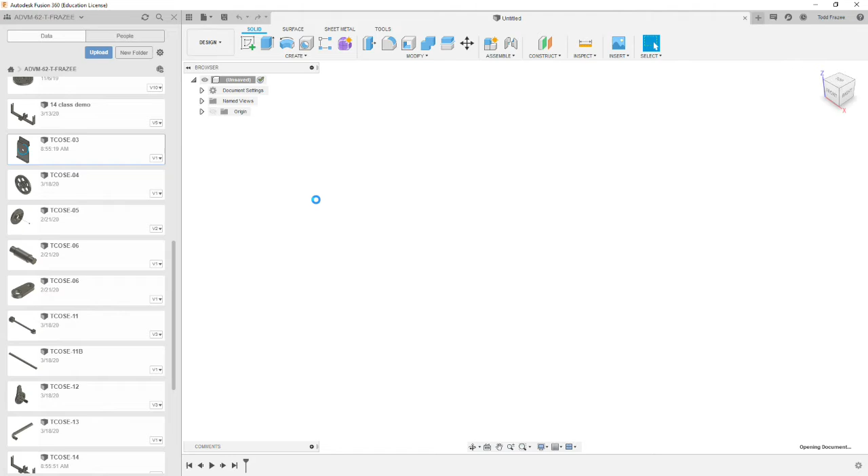And we will go through all those steps in this tutorial. So first we're going to bring up our model, you're going to open the TCOSE-03 model. I'm going to go ahead and minimize the data panel so we have plenty of space here. Okay, we've opened our file, our -3 file, and it's a sheet metal part.

So to support the manufacturing side, we have to create what's called a flat pattern. And the unfold command is only for modeling purposes. The flat pattern is a support manufacturing. So it creates an actual extra entity here on our feature tree.

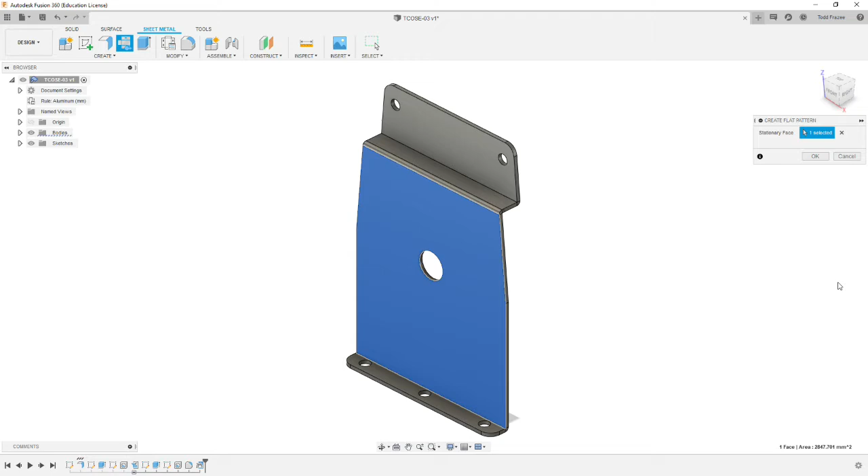You're going to go to the sheet metal, create flat pattern. You're going to pick on a neutral plane just like you did with the unfold command and select OK. And it's going to enter a mode similar to sketch mode where you can change the flat pattern itself. And what it does is it puts in the bend lines where you would actually bend the part, and those go in as these phantom lines and flattens the part.

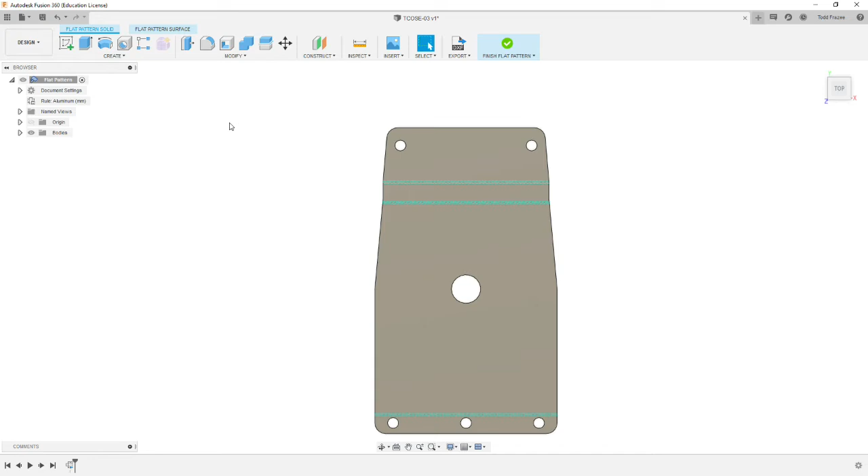We don't really have to do anything to it, so we're just going to hit finish flat pattern. And then what happens is a flat pattern feature showed up on the feature tree below document settings. If you want to go back to the flat pattern mode, you just select the box and you go back into it. So we're going to hit finish flat pattern.

And it's always a good time to save when you're switching modes. And then we're going to switch to the manufacturing workspace. We want to make sure our units are defaulting to inch in the manufacturing workspace because our equipment's running in inches. And the model, when you're in this mode, will be all in inches.

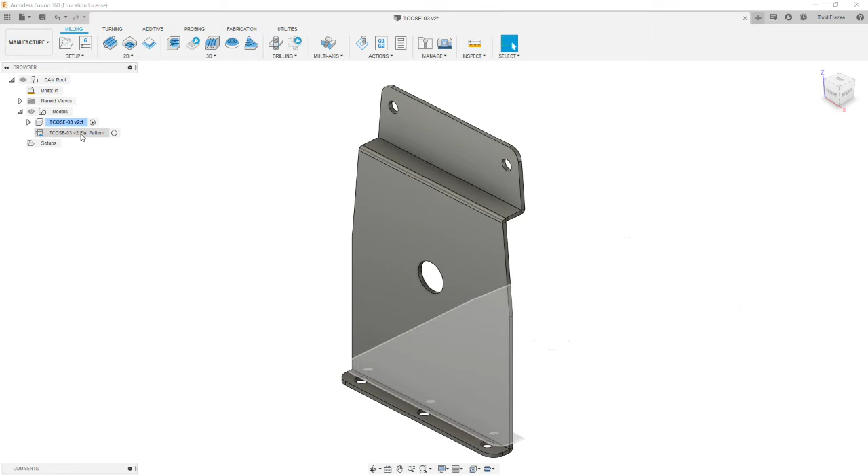Okay, so once we're in manufacturer mode, you need to expand the models tab. And embedded in it is the flat pattern. So we want to activate the flat pattern. And it shows it in a flat state. And it defaults to throwing an X, Y, Z plane like shown.

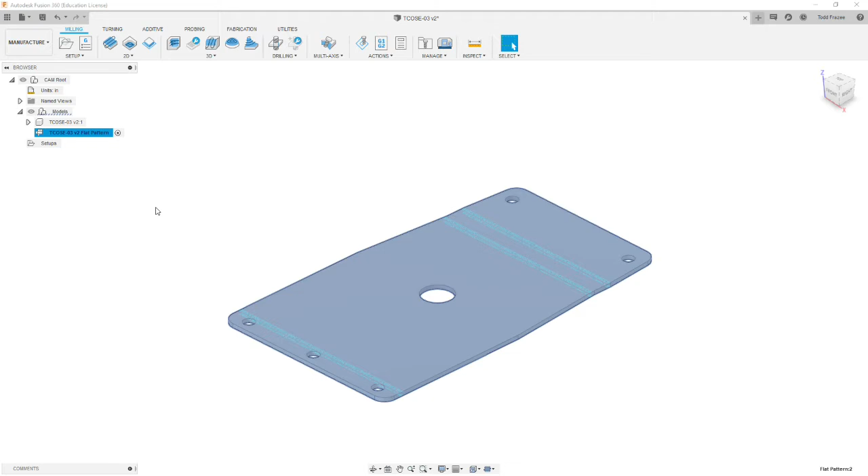And we now can start working on the toolpath. So the very first thing you do in any of the manufacturer steps, no matter what mode it is, you're going to create a setup. We're going to click on setup. And we're going to make sure we're in fabrication mode, because we're going to be using this cutting command. You're going to go to the pull down menu under setup, and we're going to create a new setup.

Now there's various parameters in here that are going to set up the stock and your origin and the naming of your program that you're actually going to run on the machine. So the tab order on this to me is not intuitive. It seems easier to me to start on the stock tab because some of the selections under setup are dependent on the stock tab.

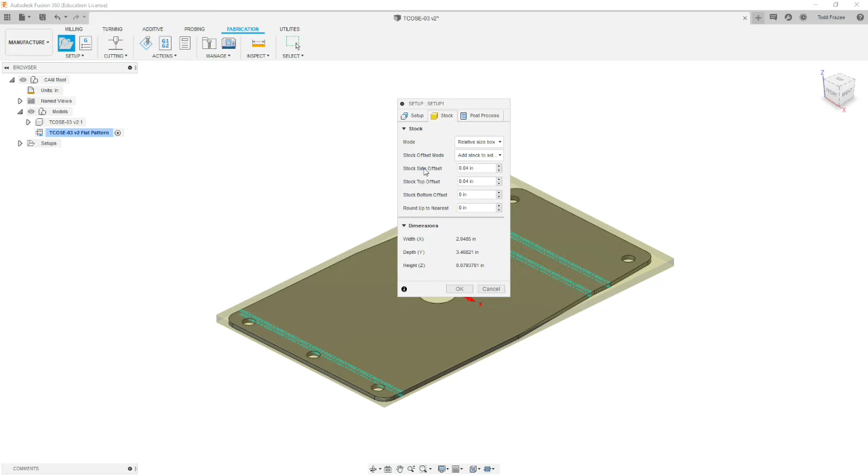So go to the stock tab first, and we're going to set the material size that we're going to start with. So we're making this part, but we're going to make it out of a larger piece of material. So assuming we're just going to cut one of these and we have a way to clamp around the edges or hold it down with weights, our side offset, we're going to leave a half inch of margin around. Now if you were obviously cutting multiples of these, you might use a different scheme, but for the purpose of this demonstration, we're going to put a half inch margin around the outside edge.

And we're going to start off with material that's on thickness. We're not milling it down this thickness with this type of process. So our stock top offset is going to be 0. It's going to be the same thickness as our model. So this is automatically taking the extents of our model and offsetting for us.

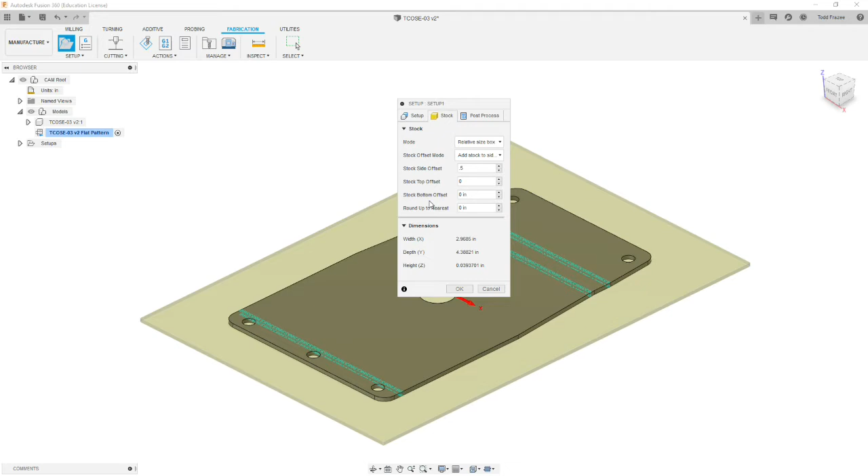Okay, so that's all you need to set for the stock. We're now going to go back to the setup. We need to choose our orientation on the machine and our origin.

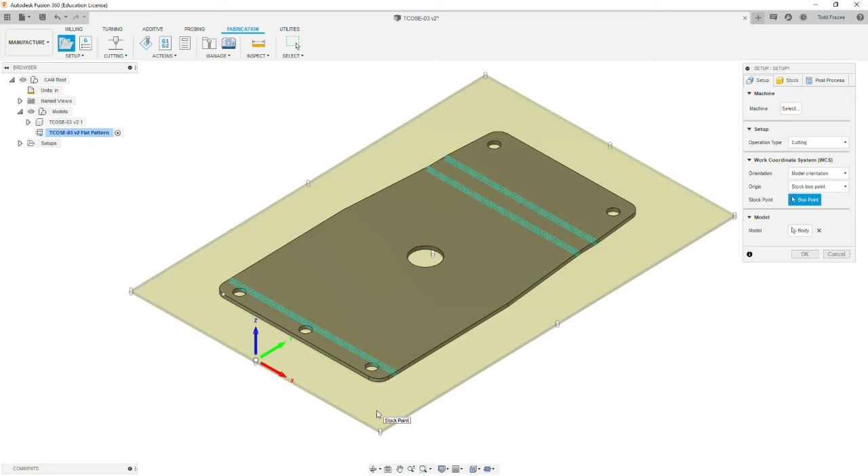It allows you to move the origin around by selecting on these box points. They're preset places that you might want to put your origin. For the purposes of this exercise, we're just going to leave it in the center of the stock and leave the orientation the way it is.

What this determines is you're going to need to put your shorter side of the stock along the x-axis travel of the machine, and the long direction is going to have to be in the y-axis of that machine. Alright, so we've done everything on that tab.

Now we're going to go to the Post Process tab. The program number here on most CNC machines is a 4-character number preceded by the letter O. A lot of the Waterjet and torch machines, flame tables and lasers use their own proprietary code. Some of them don't use G-code, so I'm not familiar with all the different variations of formats, but to be safe for anything with a Fanuc style controller on it, you want to keep it down to 4 numbers.

We're going to use a naming convention of 03, which is our part number, and 01, which will be our first program for that part number. For cutting, that's the only program we're going to need.

Program comment, you have more freedom to put what you want here, so I'm going to put Waterjet cutting. You could put program 1, setup 2, but this allows you to differentiate this from, say, a mill or lathe program. Our work coordinate offset, we're going to set as 1. That'll use the first work coordinate system that the machine has available. Then we're going to select OK.

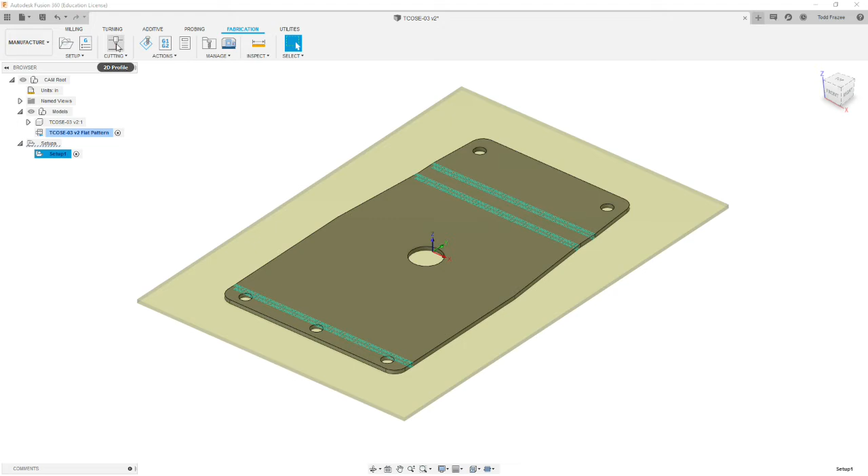Alright, make sure your setup is highlighted, and we're going to go to the cutting option, which is the only one you have under the fabrication tab. That's the only process. It's going to open up this multi-tab window.

So first tab is tool, second tab is geometry, third tab is heights, fourth is passes, and the last one is linking.

The first tab is going to define everything you use with the tool. Now in the context of machines like this, it's really a tip diameter of a nozzle. And you define the diameter of that so it knows how much to compensate for the diameter of the tool.

And there is also feed rate information. So it's how fast is it going to be cutting when it goes through the material, contacting what would be a finished edge. There's a lead in and lead out, which is when it's starting its cut off the material or off of your finished part.

Oftentimes when a tool starts engaging in the material, you get wander of the cutting device or you get a bad finish. So you start off in the material in what would be leftover stock and then start your cut and then progress towards the finished part. So those parameters, you can set them at different feed rates.

The second tab, geometry, is selecting what you want to apply that tool to. The third tab, heights, sets all the heights for the machine.

So the machine often will have a rapid rate, which is as fast as the machine will go, to get into position, and then it lowers its head if it's capable of that, and retracts when it's done with a process. And then there's where it's actually cutting the workpiece, where it's going to slow down and go to the feed rate that you input under the tool tab.

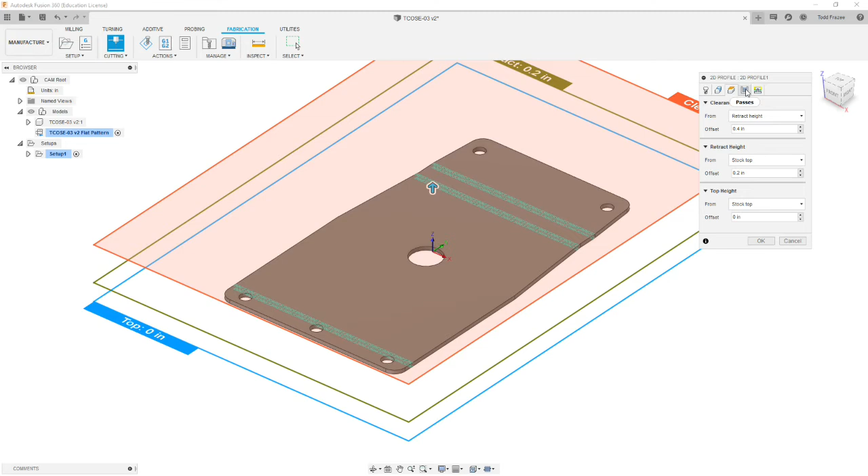So that's what these three different fields do. And then we have our passes. It describes what kind of compensation there's going to be for the cutter, what order you're going to go in, if you're going to leave stock for another process to clean up, and

things like that, and in some instances, how many times you're going to go around the part before it cuts through. The last tab has some other parameters, like how do you treat the nozzle when it's going from finish cut to finish cut. Do you want to keep it down, or do you want to pull up and rapid, and those lead-in feed rates we were discussing on tab 1, the tool tab - here's some parameters you can set for how that's handled.

You can have it go in straight, or you can have it go in as a radius. You can modify the angle at which it approaches the workpiece, how far away from the workpiece it starts, and whether you want to lead in and lead out.

There's a piercing distance. Piercing is for holes - how far away from the part are you going to turn on the jet or whatever is piercing through the material. It will have to do that at a distance, then dwell for an amount of time, then burn all the way through the material and then start cutting horizontally.

Alright, so now we've had an overview of the different tabs, we're going to go to the first one. Now the first one - because we haven't programmed anything on one of these machines yet - we need to configure the tool first before we can do anything else. So we're going to select a tool, and we don't have one currently made.

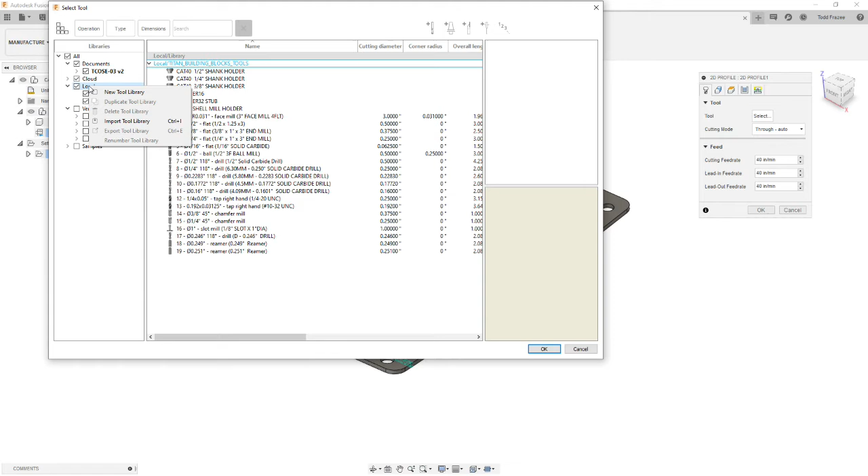Select new library, and we're going to call this TCOSE - so that's for our TCOSE project as a whole. So all of the tools that we make and use for the TCOSE, we're going to put in this container so we can pull from them again.

And as we go through the program, we're going to be adding different types of tools to this. When we're done with our whole project, we'll have a list of all the tools we need to order, or tip sizes we need to order, all on one list for this entire project.

So once we've created the TCOSE library, we're going to go up to this icon here that looks like a little laser beam. It says Create New Tool for Waterjet, Laser, and Plasma Cutting. So we're going to pick on that, and we're going to put in a description.

We're going to use a small diameter tip. We're going to call this the Fine Waterjet Tip, and I'm going to put in a tip size of 0.4 millimeters.

I haven't looked up the specifics on this particular tip, but if you do, you can put in your vendor information, you can put a product ID, and you can even put a URL to find the online item in their catalog - very useful later when you're building your tool list. We're going to get into that later, but for this exercise, we're just going to leave it at this.

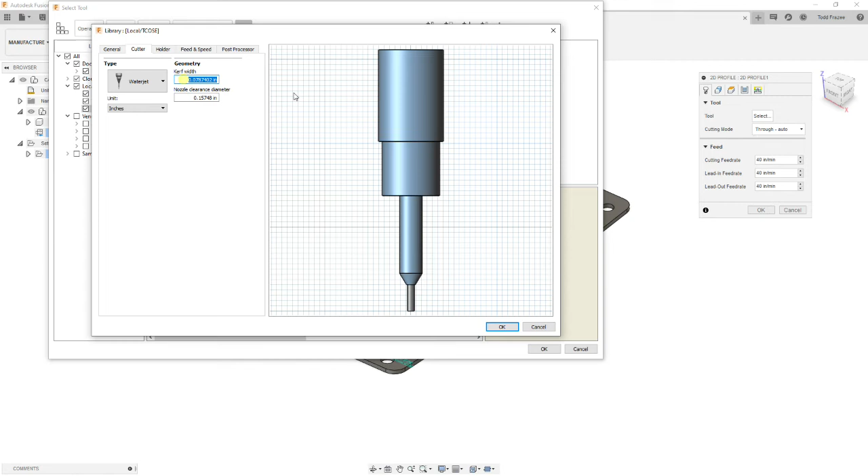Okay, and we're going to go to cutter, and it's a waterjet type. You can pick either laser, plasma, or waterjet - in this case, it's going to be a waterjet. Our units are going to be inches because the machine's running in inches, and our kerf width is the equivalent of 0.4 millimeters, so we're just going to put 0.4 mm.

Okay, and that'll automatically do our conversion because we're in inch mode. So our tip kerf width is going to be 0.015748. So the kerf is the width of the cut that the cutter is going to leave as a cut. So if you can imagine a saw cut, if you're using an 1/8 inch width blade, you make a cut with that saw, the kerf left by that cut is 1/8 of an inch.

This is a relatively fine tip for waterjet. Some waterjets aren't capable of going this fine, but the scale of these parts we're cutting is very small, so we want to use a very small tip. And the holder tab doesn't really come into play with a waterjet head because you don't have a tool holder.

And then we're going to go to our feeds and speeds and our quality control. The machine, assuming it uses feeds and speeds and reads that in our code, we're going to set that here in inches a minute. Due to the size of this part, how small it is, and because we want a high quality finish, I think we're going to slow the feed rate down to 30 inches a minute, and we'll do the same for our lead in and our lead out. For different processes, you may have this lead in default be slower, but for a jet process, it's not really necessary.

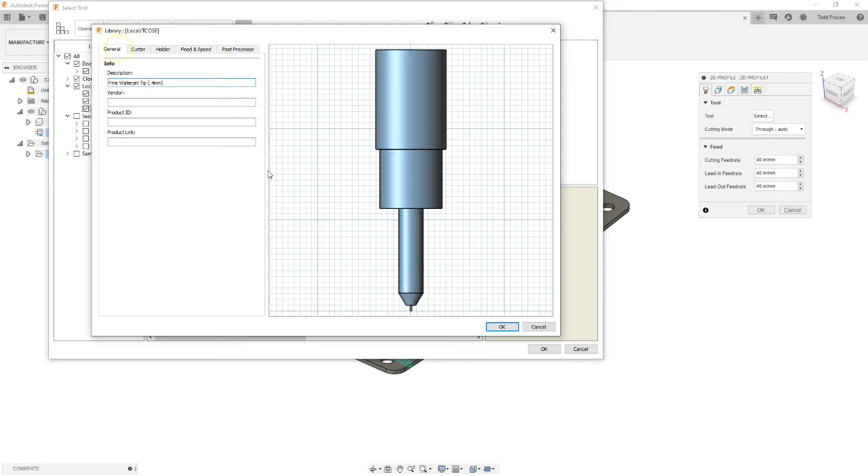Okay, so we've created our first tool, and we're going to hit OK. And it should pop up here. We got fine waterjet tip, .4 millimeters. And the nozzle diameter in inches is displayed here. So I'll hit OK, and we've now selected that tool, and it shows up here as tool 1 with our tip diameter.

So the cutting mode has several settings, but it's really dependent on the type of machine you're using. So we're going to leave it on auto, but on some of the machines you can change these quality settings and it'll change the feed rate inside the machine and ignore the settings that we're putting in here, and may put in extra steps. So you have to really reference the equipment you're using and its options for the post processor.

So we've got several different quality levels which would output different feed rates. There's an etch, which doesn't cut all the way through the material, so if you wanted to do some engraving—some machines aren't capable of that. And there's a vaporize, which apparently is for cutting through the plastic film that protects the material, especially if you're using the film as a masking material for a sign making application. You might want to just burn through the plastic first and then cut through the part so that you retain your plastic coating on the outside.

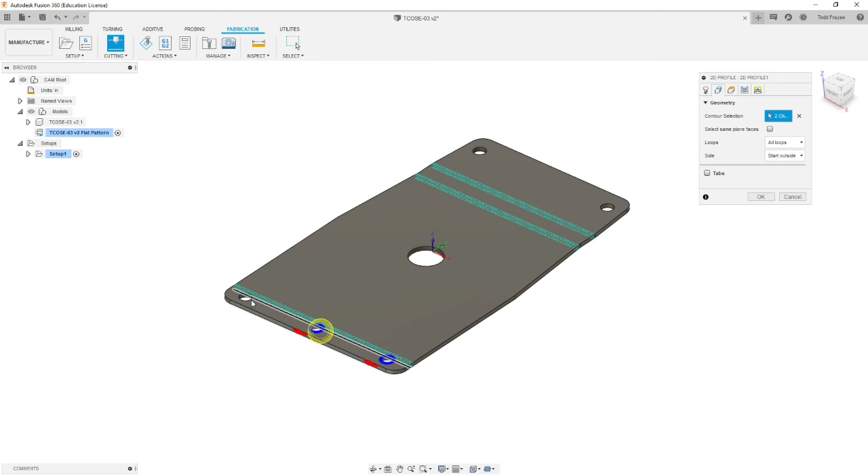Okay, so we're going to pick on our individual chains. We'll start with the small holes. Go to our large hole because the machine will travel over to that one, and then do our other small holes.

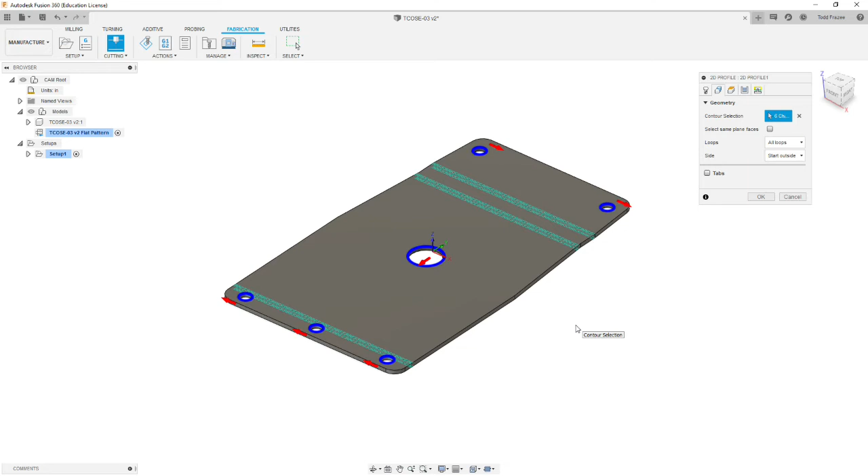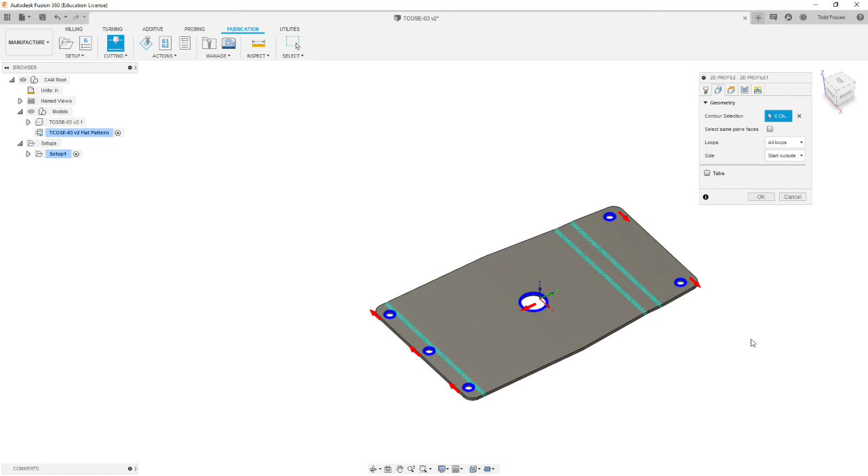Now these arrows can be confusing on very small features. The arrow toggles to either the inside or outside. So the large hole, it's obvious it's on the inside, and that's what we want. These, we can't really tell. And if I flip on it, it's such a small feature that it flips on the opposite side of the hole. Because this one's on the inside, I think it's safe to assume these are on the inside, but we definitely want to double check once the toolpath's generated that it appears inside the hole and not cutting through the outside.

Alright, so we should be able to leave all of these other boxes at default. We're going to go to heights, and these are defining different planes. As we talked about, the clearance height is where it's highest, and the head of the machine is going to rapid into that as fast as it can go. The retract height is where it may pull back to before it moves over to another feature. Now sometimes these two planes are coincident with each other, but this allows a machine to move from one feature to the other without retracting as far. The difference is you might be avoiding clamps with the clearance height, and the retract height might be while it's working within the work volume within the clamps it's already avoided.

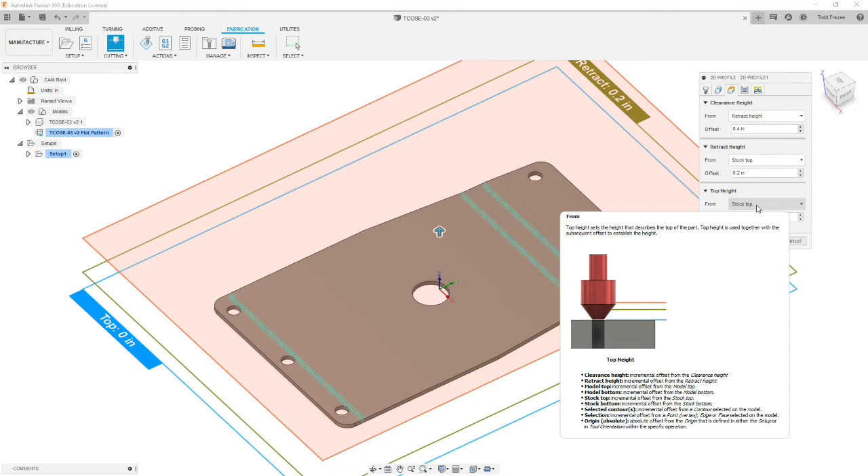And then we have our stock top side. So where is the top of our stock, top of our material cut? I selected the top of my stock material, top of the model, and so that's where it's located. Now, when we set up our stock parameters, in our case, the stock was set at 0, so it's basically the same as the top of the model. So we'll leave these all at default.

And then we're going to go on to passes. Now we want to default to climb cutting, so it's offset to the left. Compensation, you have two options, in computer or in control. In most cases you want to leave it in the controller because it depends on the machine that you're running. You want to be able to compensate in it.

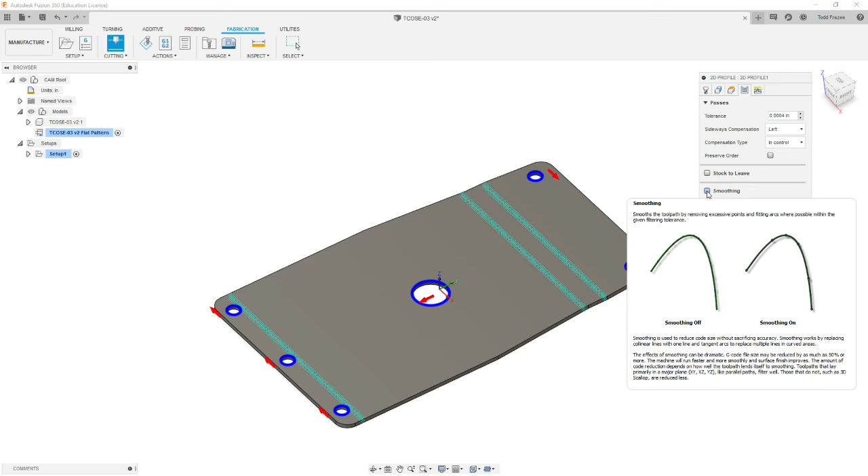Okay, stock to leave is if you're going to do a roughing pass and you want an offset on what you're cutting for another process to remove. Smoothing is the fidelity at which the curve is cutting. So if you don't have this set, you can get facets in your curved parts. For this part, we're cutting circles, so we want to turn smoothing on, and we'll just leave the smoothing tolerance at default. If you have issues with the machine not able to run that tight of tolerance, you could loosen this up. But 4/10 should give you a really close diameter circle.

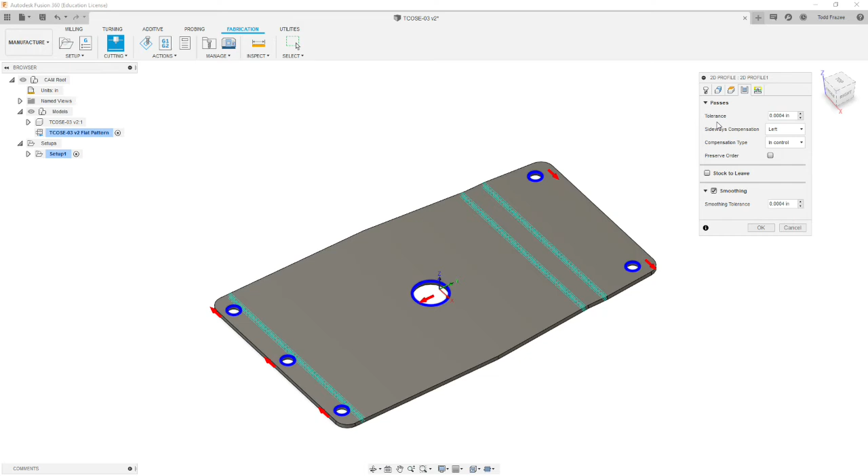Now we're going to go to linking. There's the keep nozzle down, so if you didn't want it to retract to the retract plane between cuts and you want to keep the nozzle down in position, you could select that box. We're going to leave it at default.

And then we have our lead ins and lead outs. Now we're doing small diameter holes, and the default lead in is almost a quarter, just shy of a quarter of an inch. I don't think we want it that much because it's not going to be able to lead in on these smaller holes. So instead of 196 thousandths, we're going to switch that to something closer to the hole size. Let's put in 0.040 because our holes are 125 thousandths in diameter, close to an 1/8 inch. Our sweep angle is the angle at which that lead in is going to approach the workpiece. We could leave that at default, but with these small diameter holes I'm concerned that if we come in at a 60-degree angle and come back out, you may gouge the hole you just made. So we're going to set it at 90, and that way it starts at the center of our hole and goes in 90 degrees to the start of the face of the cut.

Alright, and so we have a piercing clearance, and it looks like the piercing clearance is basically the diameter of our beam by default.

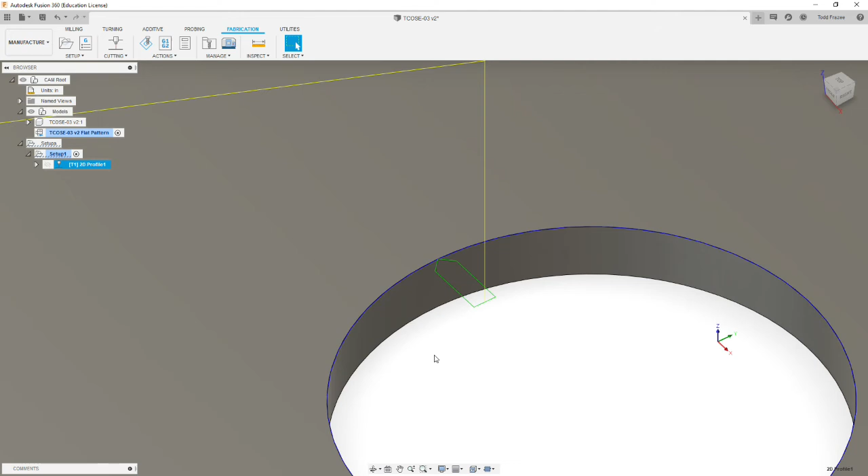And we've now cut our holes. So if we zoom in, you can see that there's a 40 thousandths lead in with a 60-degree angle, which I forgot to change. So it's possible that this angle could gouge into our sidewall, but we'll go ahead and leave it.

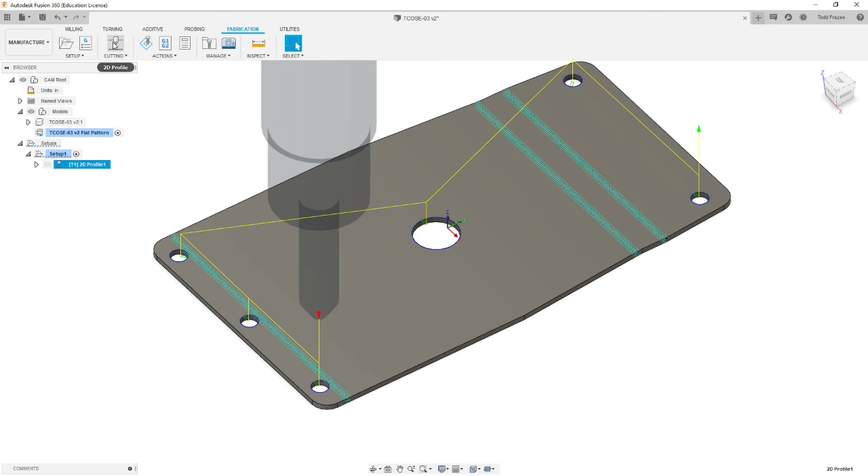Now we're going to move on to our parameters to cut the outside perimeter. Okay, so to do so, we're going to hit cutting again. We're going to leave all the tab 1 defaults alone for the tool. We're going to come to our geometry and we want to select the outside of our part. The arrow should be on the outside of our cut. If it was on the opposite side, you'd be cutting your part too small.

And then we want to select, we're going to keep these others at default, and we want to select this box called tabs. What this will do is automatically put tabs on the outside of our material so that it holds it in place. Then we can simply come back and snip these tabs off and clean up the little edge where it's holding on. So if you've ever done any work with, say, photo etch parts or like a model kit, this would be like its sprue that holds it on, and you cut that off before you start building an assembly.

So we're going to select tabs, and because this is a fairly small part, we're going to put our tabs every inch, and we don't want them an 1/8 inch thick, so that's the same thickness as our material. So let's go half of that at about a 1/16, which is 0.06. All right, so that would be the width of our tabs.

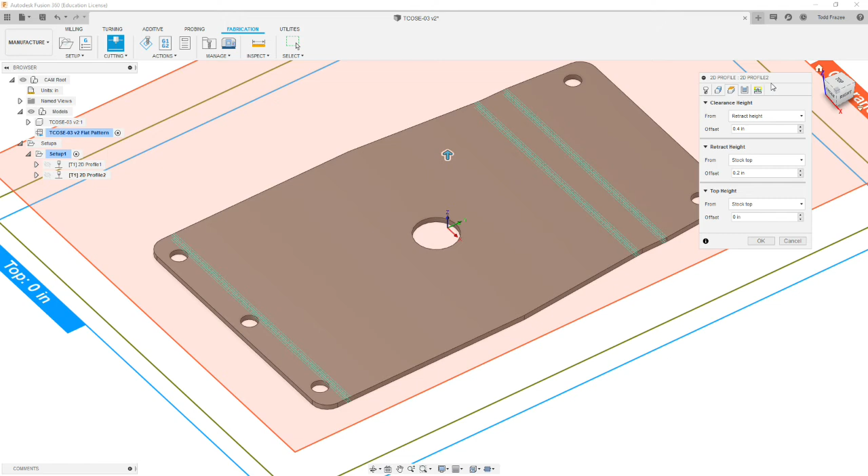And then we'll go to heights. We're going to leave all this at default. We're going to passes, and we'll leave all of this at default, except we're going to select smoothing. We're going to go to our last tab, which is linking, and we'll leave this at default, and we'll leave our lead in at the default because we are cutting the outside of a much larger part.

Okay, so we got all that set, and we'll hit OK. And as you see, we have these multiple lead-ins, and the purpose of those are the tabs we wanted to leave to hold it to its surrounding material. So we'll simply snip these off, file the little tab pieces, and we don't have to worry about the part flying off the machine.

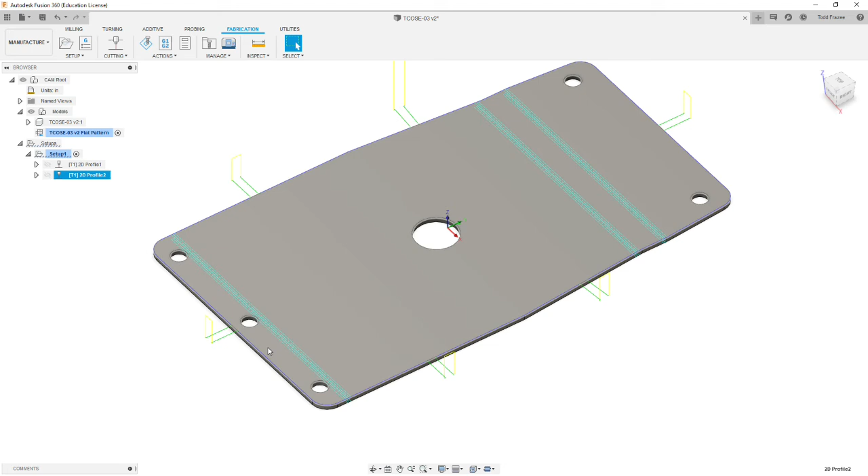Alright, that finishes the programming portion. Now we're going to go and we're going to simulate this so you can see what it looks like.

So let's pick the setup so that it highlights the stock that we're starting with. It should show the origin. And then we're going to pick, and it's going to simulate everything in that setup. If you just had one of the segments highlighted, it's only going to simulate that one segment.

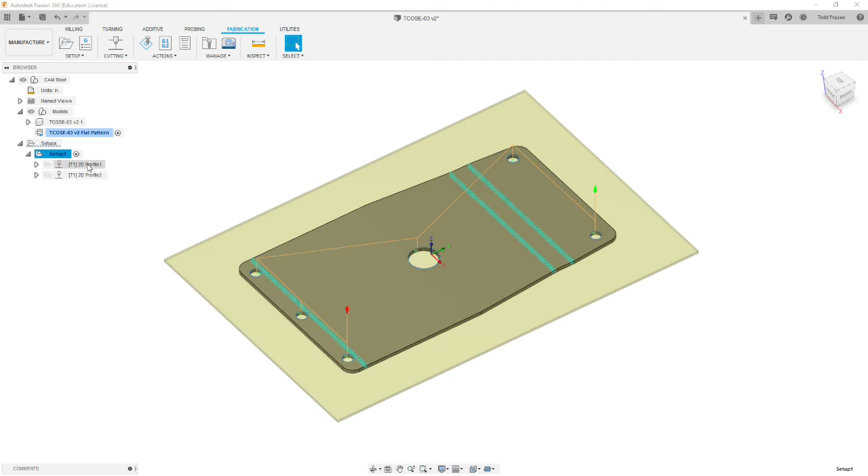We're going to pick the Simulate tab icon, and it's going to quickly show all of the moves. So everything that's in yellow is at rapid, the green is a lead-in, and the blue is feeding into the workpiece at their appropriate feed rates.

What we're going to do now is we want to make sure that stock is selected. By default that's probably not selected. Make sure that's selected and it'll show this green piece of stock, and it calls it vinyl. It really doesn't matter for the simulation. And now we can play it. So pick the play button and it'll show your jet tip moving around and making its cuts.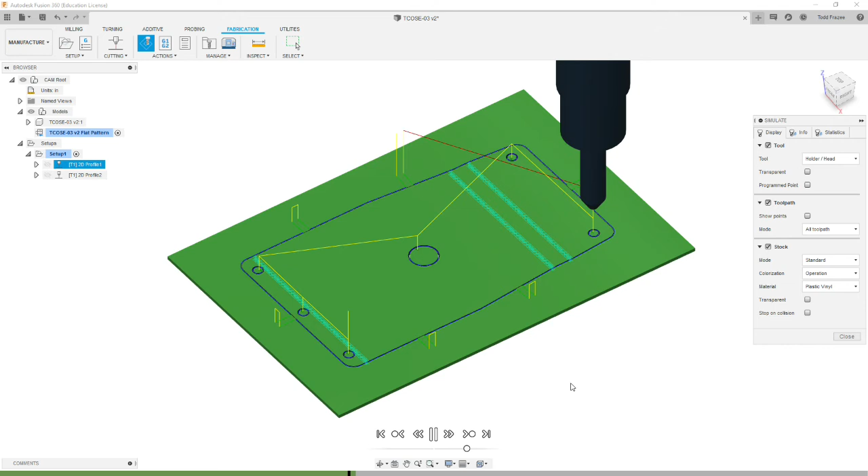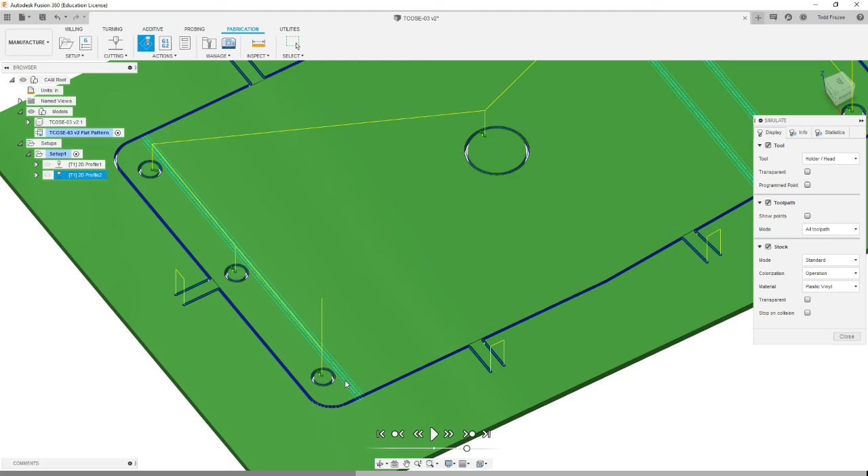Alright, so that's your simulation, and if you zoom in really far, you can see through the part where it's been cut, where it's cut through. So these will be slugs that'll fall out, and we lead in so that we aren't damaging our part.

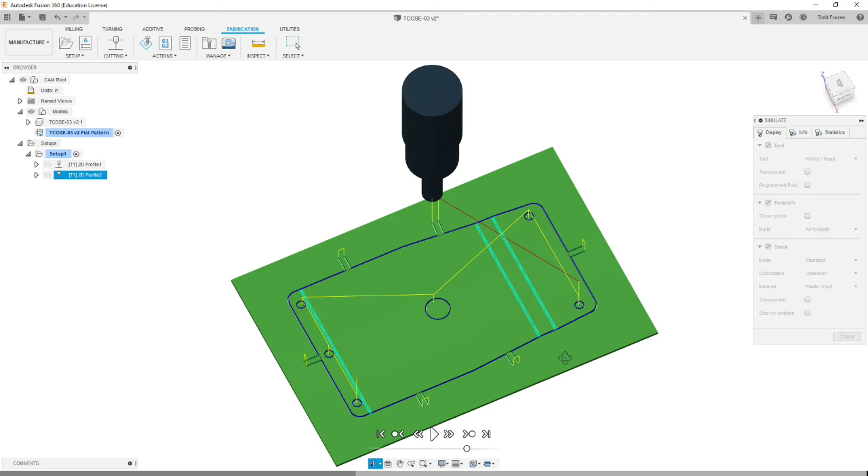Okay, so now for your assignment. The next 2 steps you would have to do before you run it on the machine. But you also want to save off electronic versions of these two documents, and you're going to upload those in Canvas. We'll go through those steps.

So you want to make sure you have your entire setup highlighted. We're going to generate what's called a setup sheet. This setup sheet will show an image of whatever you have displayed on the screen. So it's best practice to have what you want on the screen in the orientation you want it, zoomed in so you can see where the origin is for the setup operator to know where to set up, and a visual representation of the stock.

And to do that, you have to have the setup highlighted before you do this next step. We're going to pick on setup sheet, and it asks you to pick a location to put it. It defaults to HTML. Pick my default location as where it's suggested. And what will happen is an HTML setup sheet will show up. It'll have the program comment, Waterjet cutting, and the job description is setup 1. That came from the setup name.

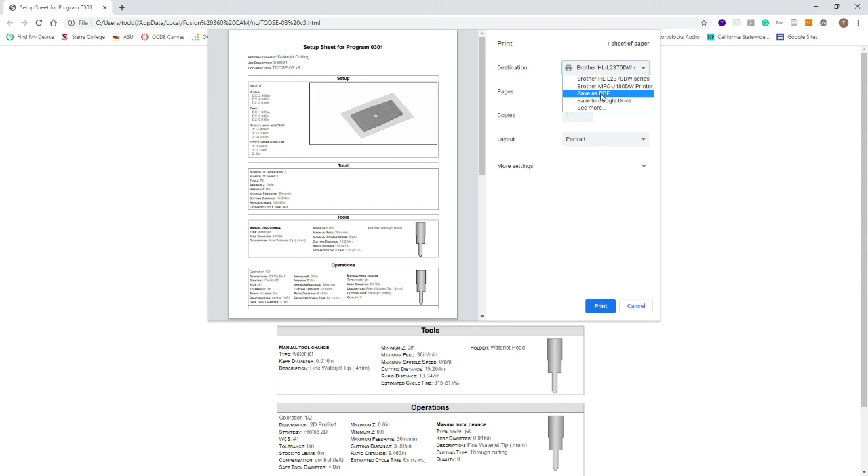So I'm going to save this as a PDF. In my case, I'm going to create a folder for myself for ADVM62 on my desktop, find it easy, and I'm going to save that setup sheet. So it's the setup sheet for the 0301 part.

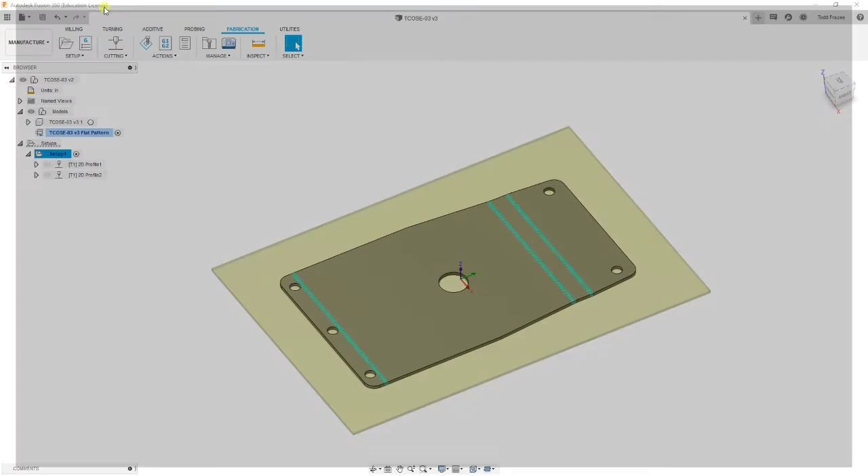So that's the first document you need to submit. The second document you need to submit is the code that actually runs the machine. So we're going to post-process. Now, a post-processor is like a compiler, you might have heard of that term. But it basically generates the code from the programmed toolpath that you made.

Again, you need to have the setup highlighted. If you only have one segment highlighted, you're only going to post out the code to make that one individual segment. Now, if you notice, there's a bunch of windows here. The main thing is you need to output using a post processor for the machine you're going to run this on.

So we have an Omax Waterjet. We're going to select Omax Waterjet. But if you pick on here, there's all kinds of different machines, and some of them are mills, some of them are lathes, some of them are water jets, lasers, whatever.

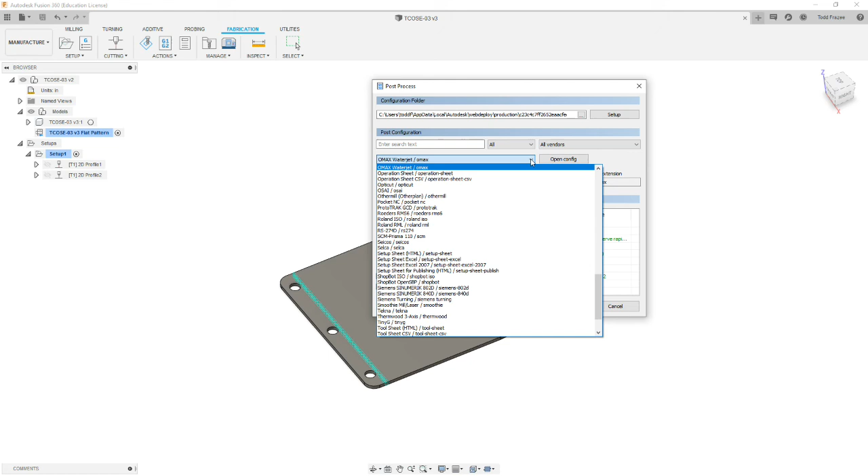If you don't have a post processor for the machine that you own or are using, you can go out on the web, and oftentimes Autodesk will have them out there. If there isn't one there, you can actually request that Autodesk make one. I think you have to pay for that, but oftentimes there's people out on the web that have already had that made.

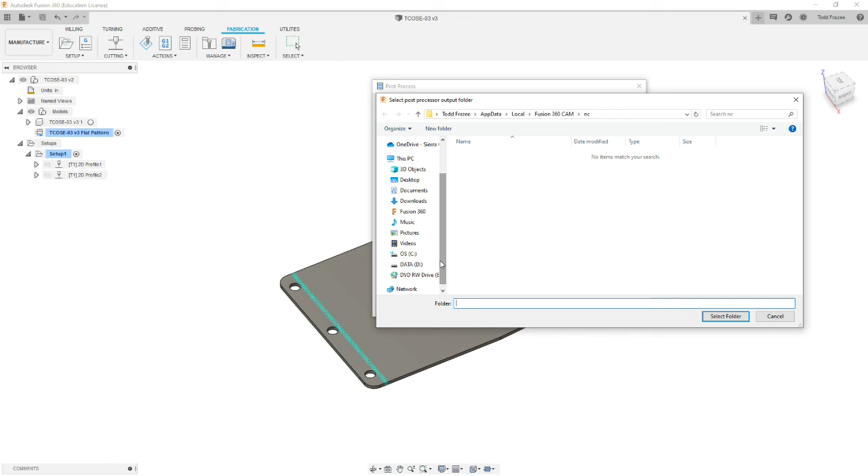You're going to pick your output folder. So I'm going to go and put it in that same folder that I created on my desktop for the class, ADVM62.

I'm going to select that folder so I know where my programs go, and they go in the same place as my setup sheets. The program number or name we put in at the beginning of the setup will occur here, and our program comment also came up here.

You can edit them if you want, but it's better practice to change them in your setup. We're going to leave everything else at default. These are some parameters that can be adjusted for the particular machine you're using. We're going to select this Open NC file in editor, so it'll pop up with the code file in front of us to verify it post-processed.

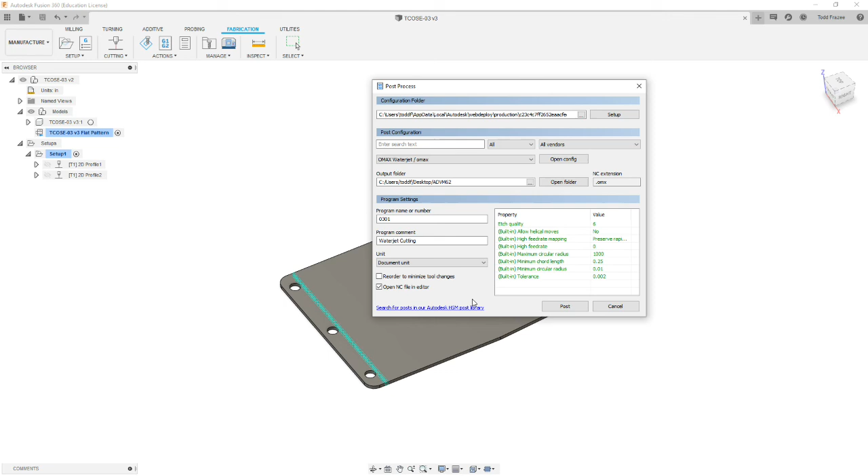Hit post, pick your location, which in my case is the ADVM62 folder on my desktop. Save. It'll pop up with the actual code in whatever text editor you have. You don't want to modify it or save it in here, because you don't want to change the formatting of it. It popped up in WordPad for me.

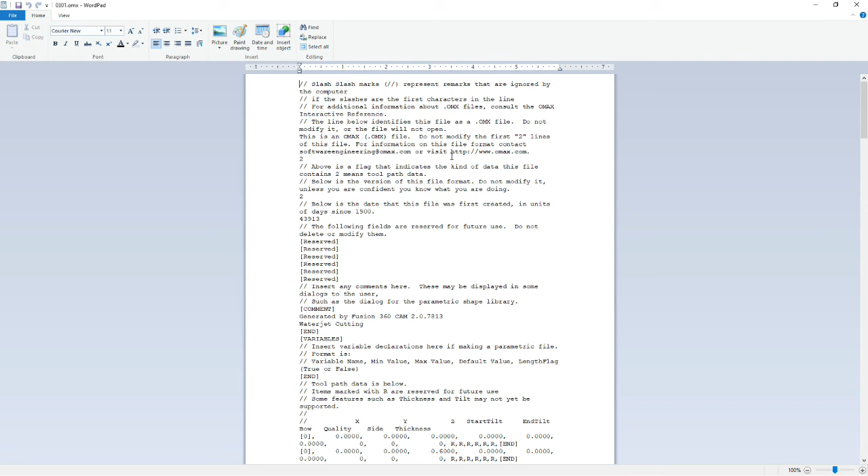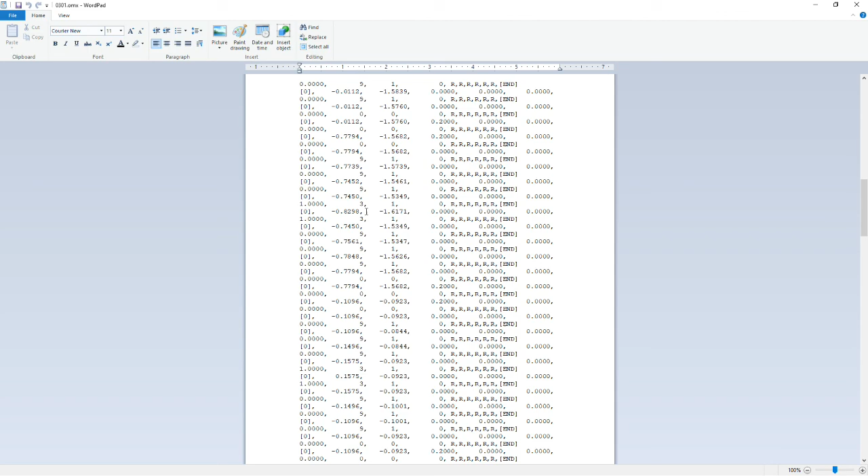I'm not that familiar with OMAX machines—it's not using a traditional code. Looks like it uses an Excel-type table, but these are all the coordinates it needs to move to cut the part. We're going to close that window. That's it for cutting the part.

Now we're going to move over to Canvas, and I'll show you how to upload your homework.

This is the instructions on how to submit your homework for the CAM assignments. For your first one, which is the -3 part, we'll go to Unit 8 and the assignment for the -3 CAM part. You need to submit a setup sheet for every program you did for this part, which in this case we only have one. If you had two, you would have two setup sheets.

Then you have to submit the code file with the corresponding setup sheet. So in this case we only have one, but if you had 2 or 3 programs, you'd have to submit double that number of documents.

We're going to select Submit Assignment, and it'll pop up with this box down here at the bottom. You're going to choose your setup sheet file, which in my case I put on my desktop. You want to save those in a place you can find—I made a folder for the class.

The setup sheet is going to be a PDF or HTML, and it should say setup sheet for the program and the number if you follow the instructions. We're going to select the PDF or HTML first.

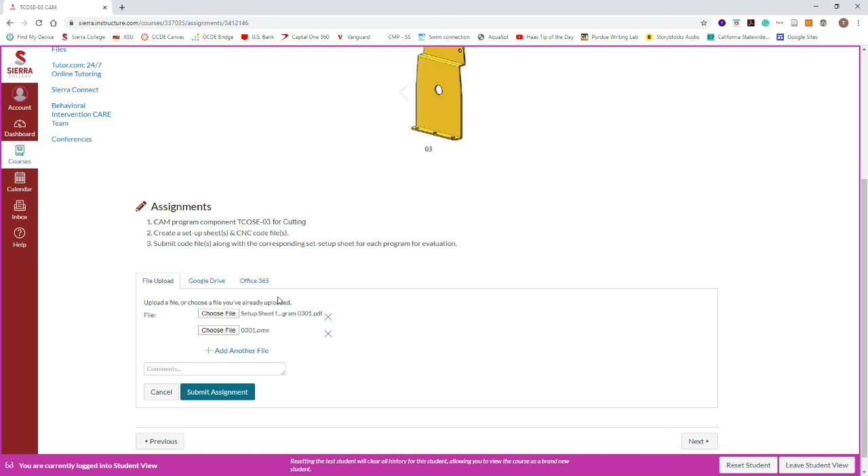Let's hit open, and then we've got our two files we're going to put up. Now you can put a comment—it's optional. If you have something you want to tell the instructor about your file, or you had a question, you could put it there. It'll show up in the assignment comments. Once you've got those files loaded in this box, you're going to hit Submit Assignment.

You do have the opportunity to resubmit. If you do so, try to resubmit everything that changed. On the instructor side in the grading module, I'll be able to see what was submitted on specific dates. And if I send you a message back saying to modify something and submit it before the due date, it'll tell me what date you uploaded your revisions, and I can see each version of the history.